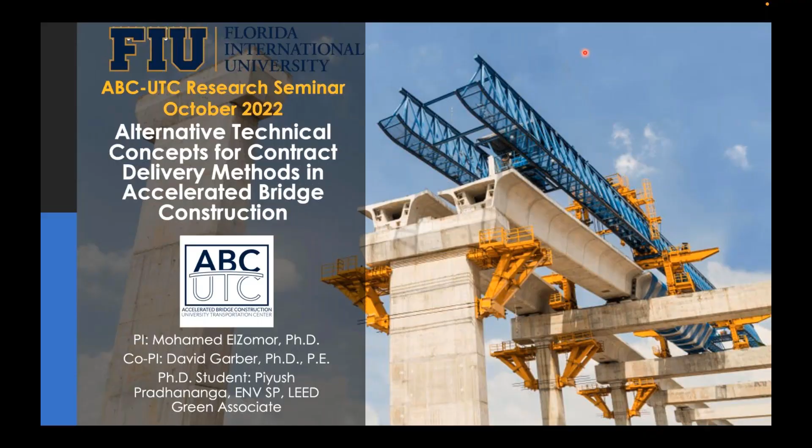The outline of today's presentation. First, the presentation will focus on the motivation of this research project and why this research project may support improving the US infrastructure system. Secondly, the presentation will highlight a brief background and introduction to different concepts of accelerated bridge construction, as well as alternative technical concepts, also known as ATCs. Then we will look at some of our research objectives. After that, the presentation will focus on results related to case studies, SWOT analysis, analytical hierarchical process, and decision-making framework. Additionally, we will also look at the practical application of this research project, and the presentation will end with a conclusion.

Bridges provide crucial access between regions and cities, linking workers to jobs, goods to markets, and people to essential services. However, out of 600,000 bridges in the United States, approximately 42% of the bridges are 50 years or older and are either structurally deficient or approaching the end of their design life. Some states have definitely worked hard to address the problem and have shrunk the backlog of deficient bridges to some extent. However, approximately 46,000 bridges are still in poor condition and require immediate attention and investment.

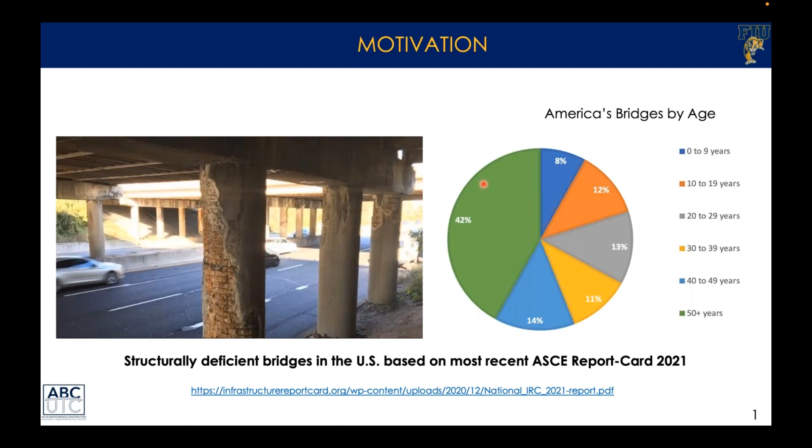Structurally deficient bridges require significant maintenance, rehabilitation, or replacement. And as we all know, delaying these activities could have serious consequences for the public. Therefore, the motivation of this research is to support bridge stakeholders to not only accelerate, but also reduce the cost and integrate innovation while rehabilitating or replacing structurally deficient bridges. ABC is an off-site bridge construction technique or prefabrication of bridges in a controlled setting that provides higher durability properties than the traditional cast-in-place method.

To this end, accelerated bridge construction has definitely revolutionized the construction industry through faster delivery of projects with reduced congestion and safe execution. However, the ABC method may not be appropriate for all bridge construction projects, and the adoption of the ABC method may require higher investment or may sometimes result in liquidated damages, as were observed in some of the case studies that we studied.

For instance, in one of the case studies we reviewed during literature review, there were challenges in constructability faced during the adoption of ABC technique. The study highlighted that the contractor faced issues during bridge construction due to misalignment of longitudinal post-tensioning ducts caused by design errors during the prefabrication process. Consequently, there were delays in schedule, and the contractor adopted the conventional cast-in-place method to complete the construction process.

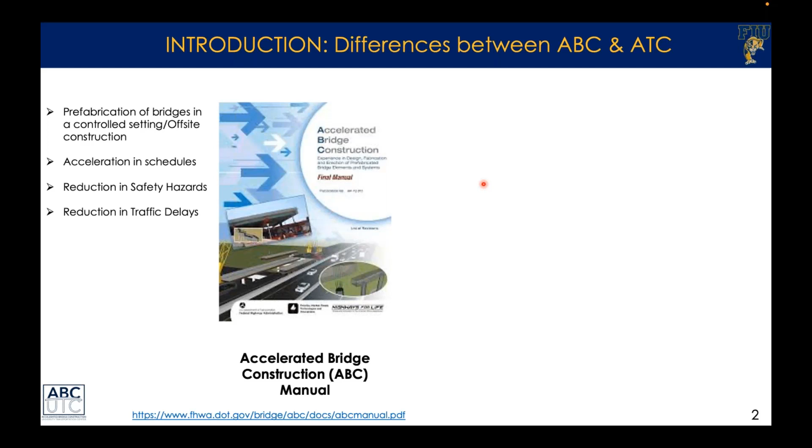Moreover, while integrating ABC within traditional project delivery methods such as design bid build, there is no collaboration between a designer or architect and general contractor during the design phase. This makes the process slower and increases the challenges in constructability of the bridge structure in the construction phase. An alternative technical concept is a potential solution for addressing this issue in ABC projects.

Basically, ATC is a proposal made during the bidding or procurement process to gain competitive benefits in terms of modifying the project scope of work. An example of ATC integration in a bridge project could be changes to the vertical and horizontal alignments of a bridge or changes to the ramp configurations, among others.

Many highway road projects have exploited the benefits of ATC, which includes early contractor involvement, reduction in overall cost and duration of the project, and integration of innovation, creativity, and best value to the owner. However, during our investigation, we found that very few ABC bridges have integrated ATC for contract delivery of ABC projects.

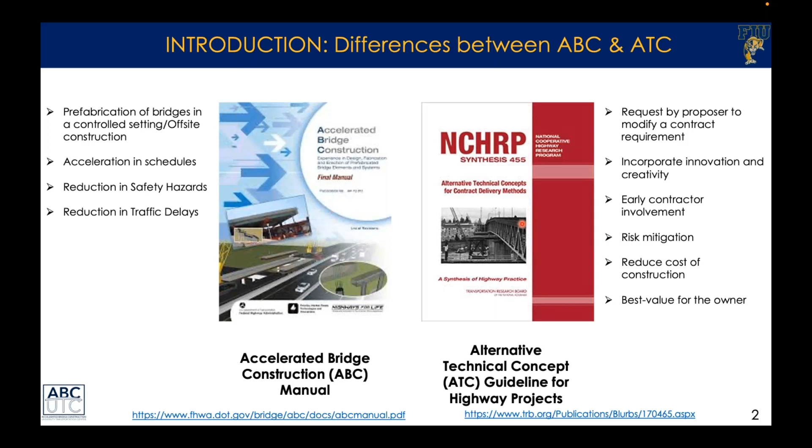In this figure, we can see that there is a separate guideline for ABC construction method and a separate guideline for alternative technical concepts for highway roads. However, to this end, there is no separate guideline or any decision-making framework for supporting ABC stakeholders to successfully adopt ATC during project delivery of ABC projects.

This slide will focus on differences in ATC submittal period in each project delivery method of a typical highway road project to give the audience an idea about how ATC submission works. As shown in this figure, in design bid build method, DOT requests bids on the completed baseline design, and contractors may submit their bids with ATCs. In this method, DOT implements a confidential process to review ATCs with contractors, and the lowest bidder wins the contract.

On the other hand, in design build project delivery method, design builders conduct solicitation of design and construction proposals only after a request for proposals is issued on partially completed designs. And design builders may submit their proposals along with the implementation of ATC. Similar to the first method, DOT implements a confidential process to review ATCs with design builders, and based on the selection criteria in request for proposal, DOT selects the winning design builder.

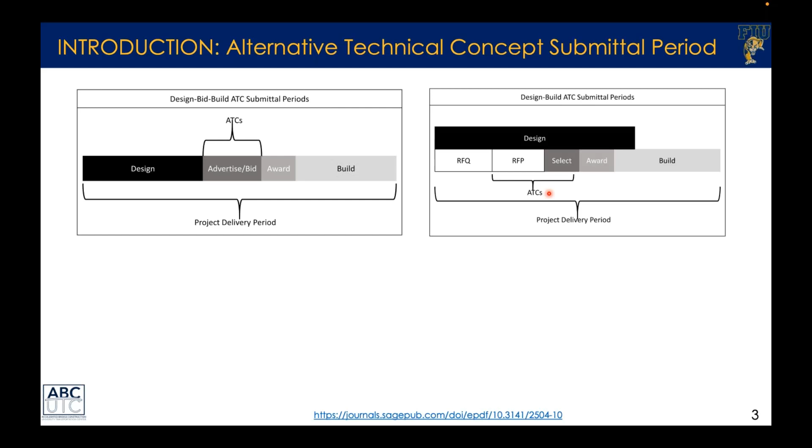In comparison to the other two project delivery methods, the striking difference in CMGC ATC submittal period is how early the agency gets input as an ATC. This early input is possible because the competing contractors can be evaluated based on their potential to add innovative alternatives to the project before selecting the winning contractor.

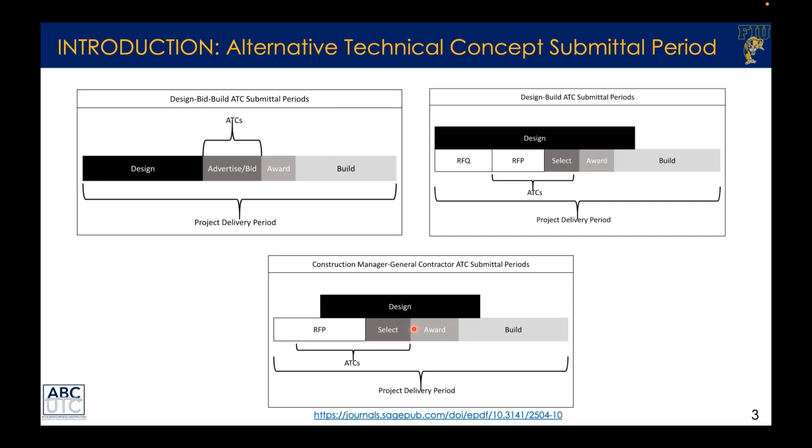Overall, the most common response includes ATC is approved or ATC is not approved, and ATC is not approved but may be reconsidered for approval upon satisfaction, and sometimes the submission may not even qualify as an ATC.

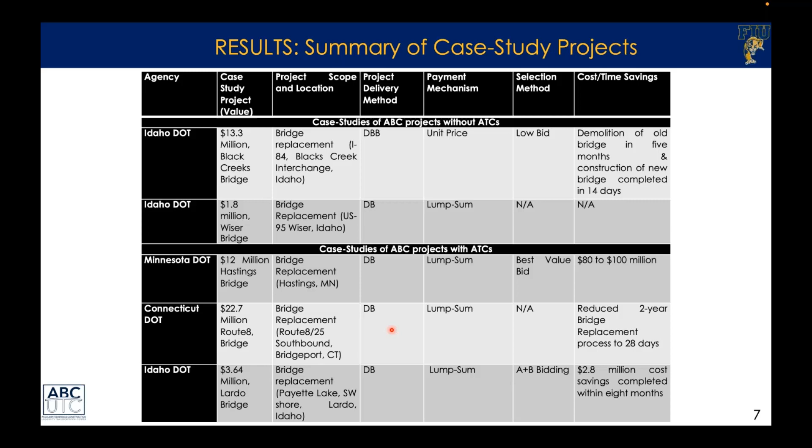In this presentation, I'll be focusing more on those ABC projects that integrated ATC to understand the overall impact of the ATC process on the final cost, schedule, and performance of the project. Then I will summarize the strengths, weaknesses, opportunities, and threats of ATC integration in ABC project in comparison to those ABC projects that did not integrate ATCs.

The first project that we studied was Hastings Bridge project in Minnesota. Minnesota DOT utilized the design build contract delivery method for the construction of ABC project with a total engineer's estimate of $220 million. There were some challenges in the construction of the new ABC bridge, such as complex foundation requirements, traffic control complexity, construction duration, impact on local businesses, and presence of temporary structures. The Minnesota DOT integrated an alternative technical concept to overcome these challenges, and it also significantly reduced the cost of the project to $120 million.

There were limits on the number of ATC submittals that could be submitted, and these were presented in 2 stages. In the first stage, concepts were presented to provide contractor with a decision on whether to pursue the solution. In the second stage, the ATCs for the project were approved through a confidential one-on-one meeting after the assessment of 6 to 13 ATCs from competing design builders.

Ultimately, the winning bidder integrated 8 of those ATCs in the project to incorporate innovative design solutions such as geosynthetic reinforced soil, integrated bridge system, and the use of SPMT in the bridge construction. Moreover, the design build team utilized a continuous settlement monitoring instrument and a column-supported embankment as ATCs for the project.

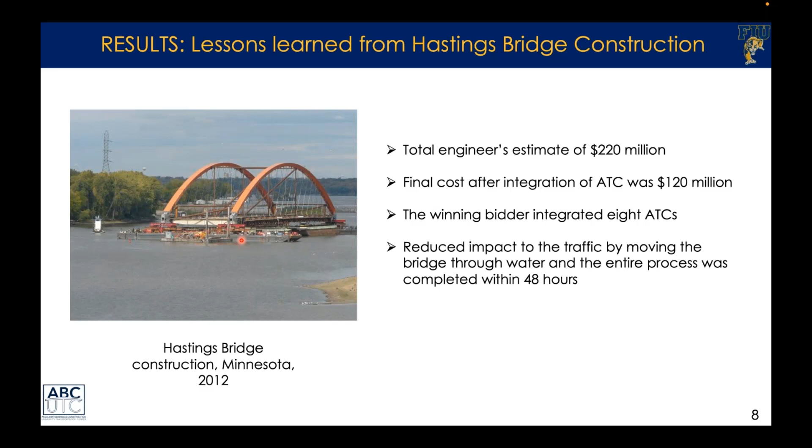The second case study that we documented is the Lardo Bridge project, which aimed to replace an 83-year-old bridge in Idaho. The conventional construction bid was estimated to be $6.4 million with a construction schedule of 259 days. According to the interviewee, the project team integrated ATCs in the design build procurement process, which significantly reduced the cost to $3.6 million with total 194 days of construction duration. Additionally, the integration of ATCs in the ABC project also reduced the impact on traffic and overall construction schedule.

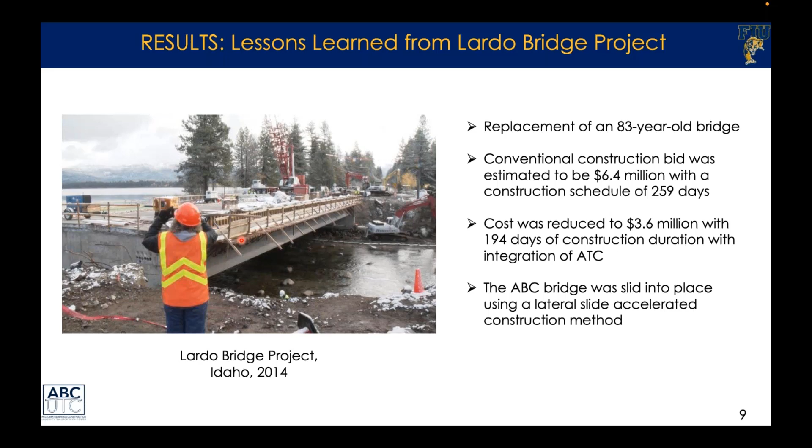In particular, the new bridge was constructed on the northern part of the existing structure, which was then slid into place using a lateral slide accelerated construction method. Since the new bridge was constructed adjacent to the old bridge, while the old bridge was still in operation, this method reduced the full closure of the bridge. The 2.5 million pounds bridge was then moved about 70 feet over the course of several hours on a sliding surface by utilizing Teflon slide pads and stainless steel anchored to the concrete shoes.

The third and last bridge project that we investigated through interviews is the Route 8 Bridgeport Bridge Construction project. This bridge was located in Connecticut, and it was originally constructed in the 1970s with an average daily traffic of 88,000 vehicles per day. Due to the high traffic in the area, the bridge was estimated to have reached its end of service life. Connecticut DOT originally estimated to complete the bridge overhaul within 2 years.

However, considering the volume of traffic being impacted by the construction, Connecticut DOT utilized accelerated bridge construction and the design-build contract delivery method with ATCs for addressing these issues. These methods reduced the total on-site work schedule to 28 days of bridge replacement with minimal impact on traveling vehicles. Moreover, the integration of ATCs through innovative bridge design solutions like the use of modern weathering steel beams reduced the amount of maintenance required over their anticipated 75-year lifespan.

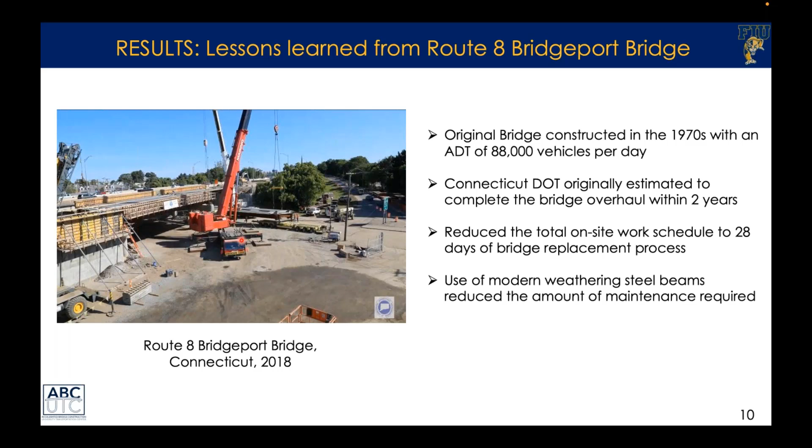This study also developed a SWOT matrix based on literature, interviews, and case study reports available on ATC-based ABC projects. This SWOT matrix will help the stakeholders understand how we can take advantage of ATCs' strengths, address weaknesses, deter threats, and capitalize on opportunities created by the adoption of ATCs within future ABC projects. To begin with, we identified 7 strengths that ABC stakeholders can take advantage of through the integration of ATCs.

First is early contractor involvement. Early contractor involvement is a strength because it helps to improve design, cost estimation, planning, constructability, and risk management, among others. Secondly, ATCs reduce ABC project duration and cost by avoiding change orders as well as eliminating uncertainties within ABC projects. Another strength is that ATCs are transferable. If the state wants to use the ATC from one of the teams that were not selected, they may do so by paying the team a stipend that varies by dollar amount, typically around $12,000.

Moreover, the use of ATCs is only approved if the alteration in baseline design or the baseline criteria is equal to or better than the original design of the ABC project. And this is a strength because it ensures the best value for the owner. The last 3 strengths have also been discussed in the case studies, and these include applicability of ATCs to all project delivery methods, enhancement in constructability, and incorporation of innovative technologies.

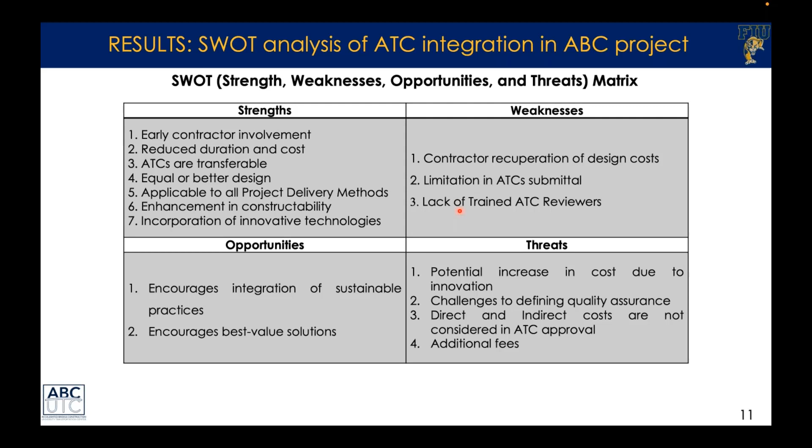As reported by one of the interviewees, the integration of ATCs during project delivery of ABC projects is a rigorous and tedious process. The positive impact of such a process is that it encourages the opportunity to integrate best value solutions and sustainable practices. In terms of threats, some of the innovative technologies used as ATCs may increase the cost of the project, which is a possibility. Additionally, direct and indirect costs are not considered in ATC approval, and there might be issues if cost data is not considered. Similarly, there might also be challenges in defining quality assurance and incorporation of additional fees as a threat.

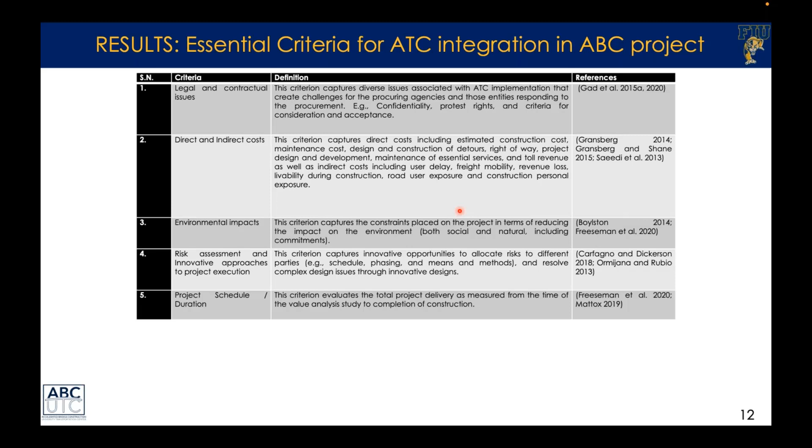Although the criteria used for integration of ATC in ABC projects may vary based on the goals and requirements of different ABC projects, the identified criteria in this slide were obtained from literature, and they represent the common criteria that have been evaluated in most of the ABC projects. This includes legal and contractual issues, direct and indirect costs, environmental impacts, risk assessment and innovative approaches to project execution, project schedule or duration, construction impact, and public perception or customer service.

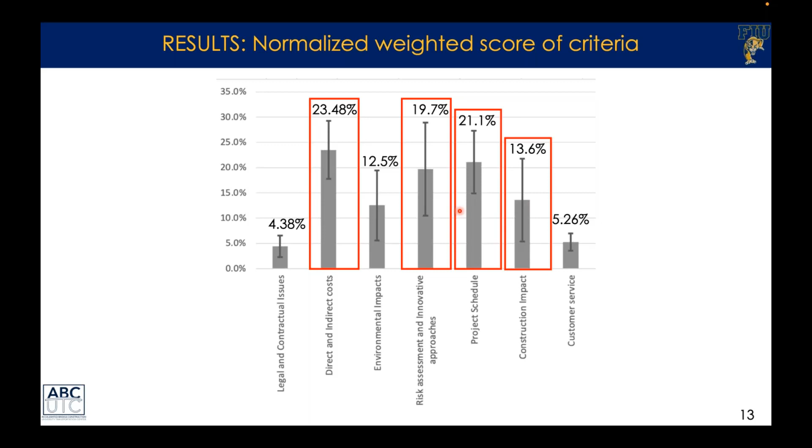The first phase is the pre-project planning phase, which is the essential stage of a construction project that focuses on identification of the needs of the ABC projects in terms of the selection of experienced and skillful project team members, as well as resources required to meet the owner's requirements. Secondly, during this phase, the contractor is also responsible for defining the scope of the ABC project, assessment of project risk, and identification of a suitable project delivery method to be used for the project.

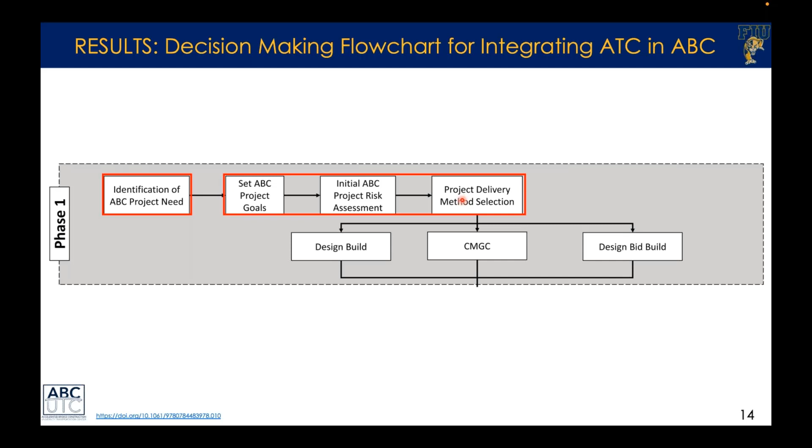In general, the determination of a suitable project delivery method for a construction project like ABC is a complex decision, and it may largely depend on project aim, budget, project schedule, associated risks, the expertise of stakeholders, and opportunities. However, since ATC can be integrated in any of these three most commonly used project delivery methods, there are no issues if any of the three project delivery methods is selected.

The goal of the second phase is the evaluation of ATCs that have been submitted by the bidders. The first step of evaluation is the generic evaluation of ATCs. This process involves commencing confidential meetings to evaluate clarity in technical information as well as limitations of ATCs. During generic evaluation, it is also extremely necessary to conduct clarification of solicitation documents in a very confidential manner.

The second step is multi-criteria evaluation. Based on the results of the analytical hierarchical process and semi-structured interviews, different criteria were finalized. Some of the criteria, such as environmental impact, legal and contractual issues, and public perceptions, were replaced by other criteria recommended by the interviewees, since those criteria had lower values of normalized weighted score, like I mentioned before. The finalized criteria for evaluation include construction time, construction risk, construction impact, improvement to safety, and innovation.

This evaluation process will help to ensure that the proposed modifications are equal to or better than the original requirement, which is one of the most significant criteria of integration of ATC. When ATCs are evaluated for equal or better than the standard project requirements, direct and indirect costs are generally not considered. There may be issues if cost data is not considered, and the approval of ATC is based only on the technical evaluation. Also, there will be no expectation of specific cost savings, as ATC will be considered as the contractor's bid price.